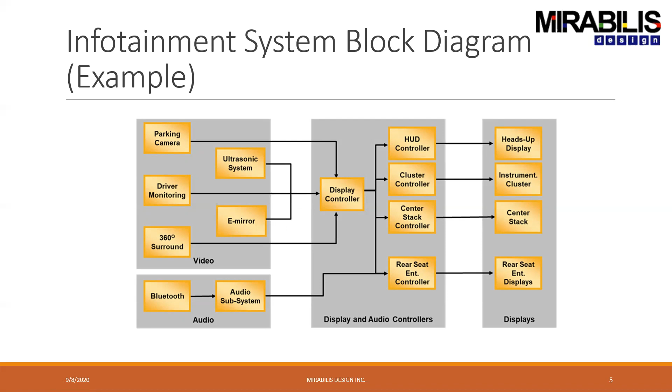Even the rear view adjustments can be done now with the infotainment. So almost everything gets connected. It's pretty big; matter of fact, I was reading somewhere that the infotainment system market is about $30 billion. So everything can be connected. It can either be a control or it can be a diagnostic with feedback. So both of those are happening.

Okay. So now, if you take the full infotainment hardware, this is the slide I took from Synopsys. There's a lot of interfaces going around, a lot of processing like CPUs, there's sensor control, there is graphics, there's even DSPs, there are security devices, there's all the network interfaces. So there's a lot of interfaces, a lot of memories, processors, even on-chip memory, things like that that are part of the whole system for infotainment.

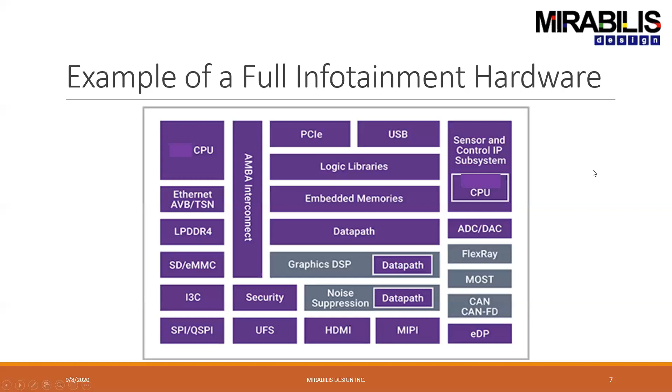Yeah. Okay. Now, the main problem that I see is infotainment systems have to be really cheap. You cannot oversize the system. So low costs, low energy consumption, and maximum number of sensor integration. Because the more sensors you integrate, there are more safety features, there is more driver experience. So it's low cost, low energy, maximum sensor integration.

So to really be able to test something, you have to run a large number of use cases with minimum amount of hardware integration. Because the space is very small, they want to use the most highly integrated chips. That's why the Drive PX is very popular, because it has the GPU, has the processor, has the CAN and Ethernet, has a lot of those integrations already done. So a single chip can replace about 5 or 6 chips in the board behind the head-end systems.

The other one that I was reading about was they don't want to build their own ASICs. Most times they just want to use or reuse off-the-shelf components and build up the system, because apparently infotainment life is very small. Within 6 months or 9 months, they have to put a new version out. So there's a constant change in the architecture or in the design of these systems.

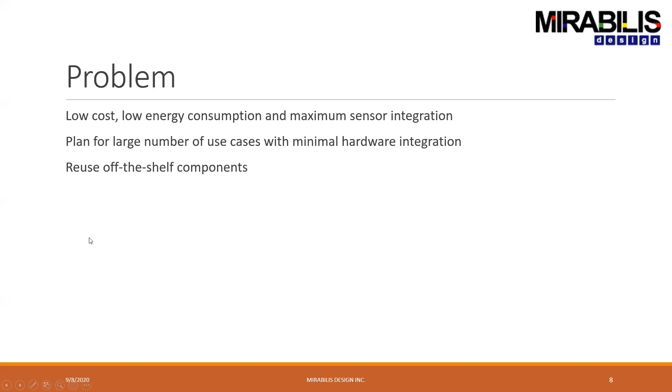So from a hardware design challenge, the biggest thing is bandwidth versus latency. As I keep increasing the latency, how much does my bandwidth fall off? So I need to keep getting the memory access for the bandwidth. So that's the most important thing. The other one is looking at how much processing time it takes on the ARM. Typically, all of these are ARM or Tensilica or ARC. These are 3 embedded processors they're using.

And so they're looking at delay for CPU or DMA, because DMA is where I have all these interfaces and I'm transferring data over to the external DRAM. So they all use DMAs. So what is the processing time associated with that?

The other big thing is that, for the display controller, say the display controller updates every 33 milliseconds, all the other processing for the data must be done before that 33 millisecond slot. So we have to look at the timing deadline for all that processing. This is the most important consideration. All of these are enabling this one, to make sure that all of them complete within the timing deadline.

Okay. Yeah. Now, the peak power, this was another thing, because these infotainment systems should be able to tolerate any temperature, be it in Saudi Arabia or be it in Finland. It should handle any temperature range. So the peak power starts increasing the cost of the system, because the higher the peak power, the higher the cooling costs and things like that. So it's very important to make sure the peak power is kept low. It's a very important consideration.

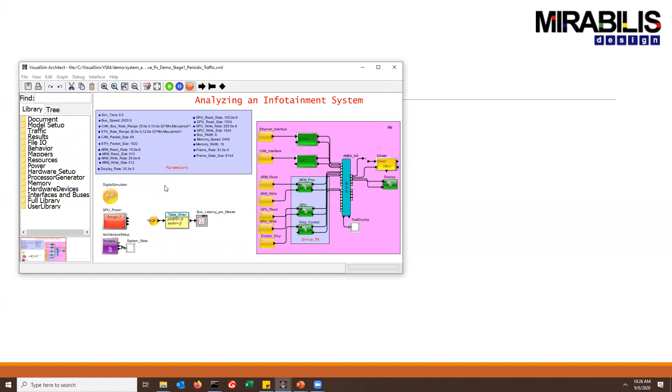Yeah, this is the one I put together. So what I did was, I kept the hardware platform like this. So I have the Ethernet, the CAN interface, multi-core ARM, the GPU, and the display controller. And then I have the AXI bus, the DRAM, display, no change.

But now I created the behavior flow here separately, meaning that I've got two different applications. Each one does a sequence of things. This part is all done on the multi-core ARM, while these here are to the GPU, and this is to the display controller. So I can kind of describe different applications. In this case, I've connected them up as two independent.

For example, here I have an enable for the display and GPU, but what I can do over here is connect them to a single flow and send them through. So rather than them having two independent flows, both of these are required, or I can feed them into a single flow and continue down. So I can have different combinations of these applications built up here.

This, I think, is a very important thing when you start getting into more details of the sequence of things my software is doing, okay? But we're not going to talk too much about that right now. Today, the focus is more on the simple traffic model type analysis.

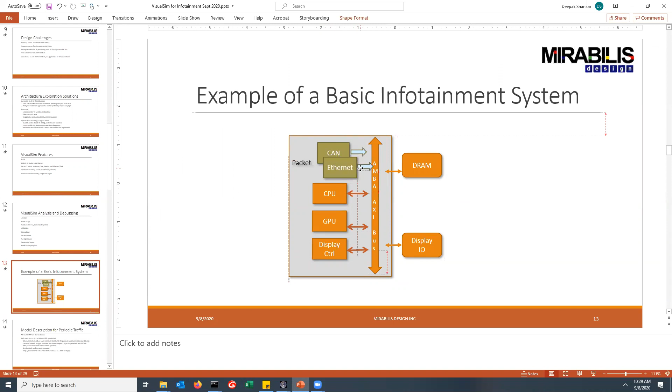Okay. So the model I constructed was this. I have two packet generators, one's a CAN and one's an Ethernet interface. Both come through the AXI bus and they go to the DRAM. The CPU and GPU read and write to the DRAM, but these are only writes. The interfaces are only doing a write to DRAM. The GPU and CPU are doing reads and writes to DRAM.

And the display controller was unique. It first does a read from the DRAM and then writes out to the display IO. So that's the sequence of operations. This one does reads and writes, while this one first does a read from the DRAM, gets the data, and then writes out to the display IO. So that's the basic system I've constructed. Any questions? No.

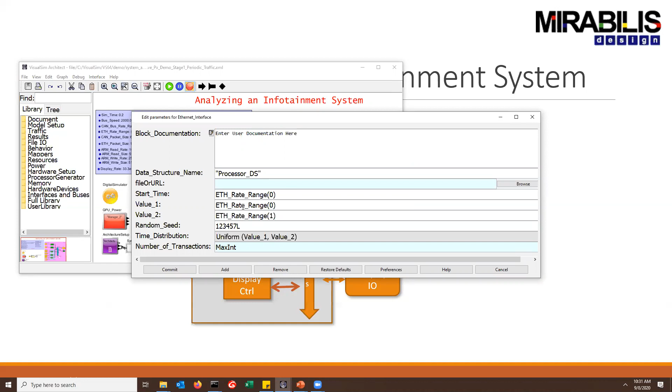So this is the system model. There's a lot of parameters, but the important ones are the CAN bus rates. This is the Ethernet. I have a start time, and then a minimum and maximum range. In this case, for the Ethernet I generate a random number between 8 and 12 milliseconds. So packets are not periodic, but come in a range, between 8 and 12 milliseconds between different packets.

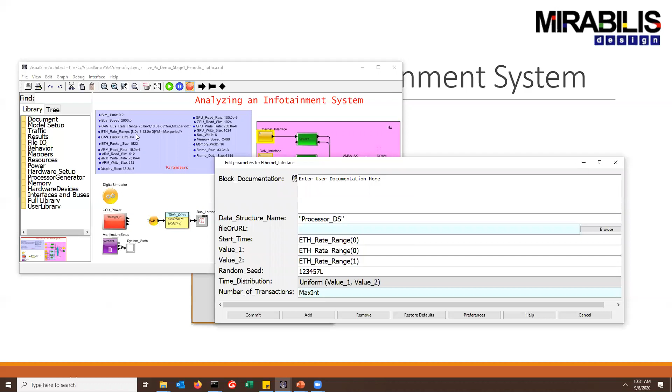Yeah, go ahead, Jimmy. Can you make the graph larger so we can read the parameters? Sure. Let me make it full screen. Can you see it now? Is it clear?

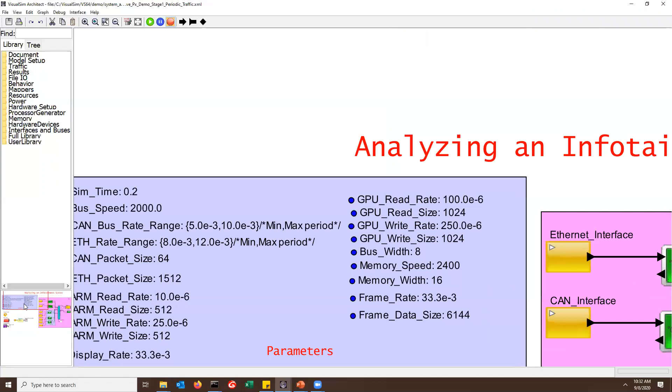Okay, so if you look at the range of parameters, for the CAN I have a min and max range. Similarly for Ethernet, I've got a fixed size for packet size.

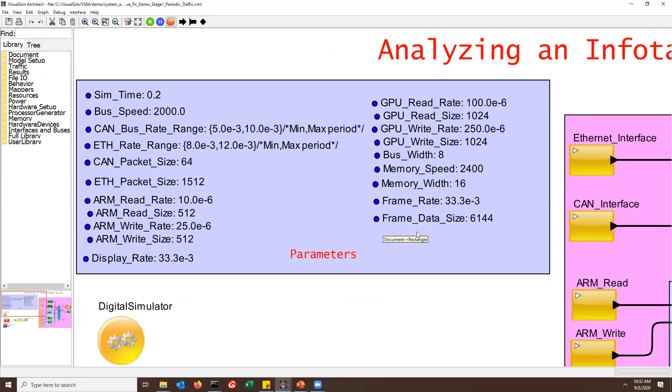These are my read rate, read size, write rate, write size. Then that's the display rate for the display controller. Same thing for GPU, and then I've got bus width, memory width, frame rate, things like that. So how is this utilized in the system?

Deepak, what is ARM read rate? I'll come to that, I'll explain what each one is. Okay, so that I just wanted to show you what the parameters were.

Now, the reason we have given lots of parameters is because we believe the user will be doing a lot of experiments. That is why we have a lot of parameters. We can discuss it and reduce the number of parameters if you want, and we can do that too. So what we have done here is we are using a traffic generator for the reads.

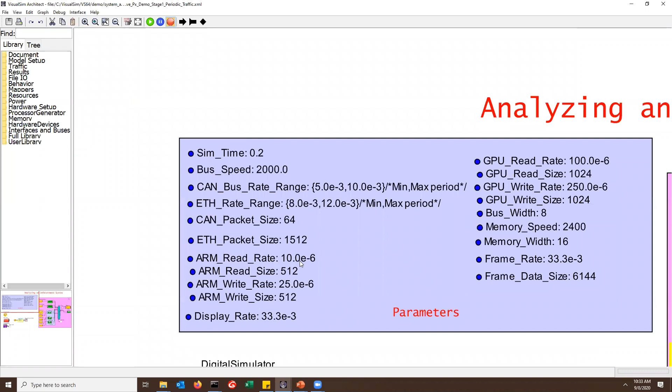So we're saying that the read rate in this particular case is a read rate of 10 microseconds. So what that means is every 10 microseconds, a request is going out—a read request from the ARM to the memory.

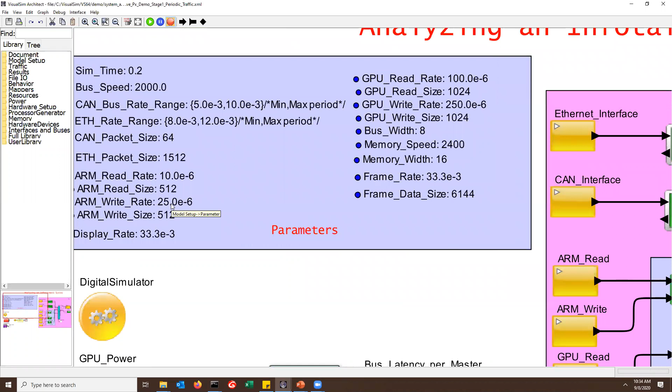Similarly, for the write, I have a write rate. So what is the write rate here? Every 25 microseconds, I'm sending a write request to memory. So read is every 10 and write is every 25 microseconds.

The value is the cycle—10 microseconds. Each 10 microseconds, to read from the memory is 512 bytes. So every 10 microseconds, I'm reading out 512 bytes. Every 25 microseconds, I'm writing 512 bytes.

Similarly here, every 100 microseconds, I'm reading 1024. Every 250 microseconds, I'm writing 1024.

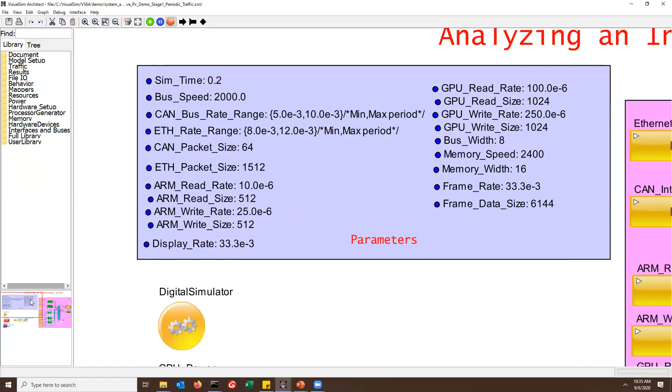So this model is very simple. Here I have my minimum and maximum range. In my device interface, all I have is a write and my Ethernet packet size—that's all, and it's going to a DRAM, nothing else is being used. Similarly for CAN, writing to DRAM and a CAN packet size, that's it. So traffic is being generated at a certain rate for the Ethernet and CAN, with the size and destination specified.

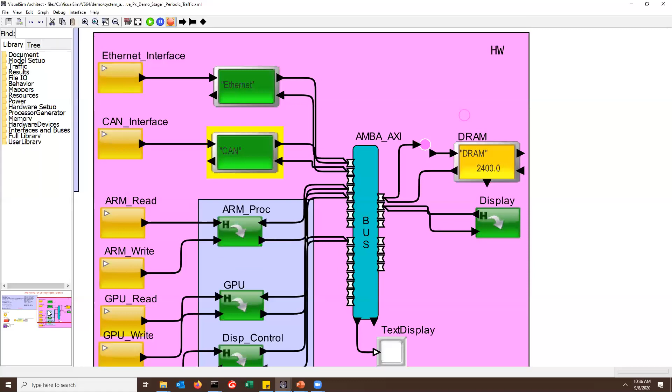Now, for the ARM, this is a little different in the sense that I have a read rate and a write rate here. Now this one here is a hierarchical block, because I have the read and write that I have to combine into a single flow.

So here I'm setting that this is a read, this is the size, and that's it. Similarly over here, I'm setting the read.

Yep, I was making changes today. Sorry about that, good catch—extra chocolates for Tanaka-san.

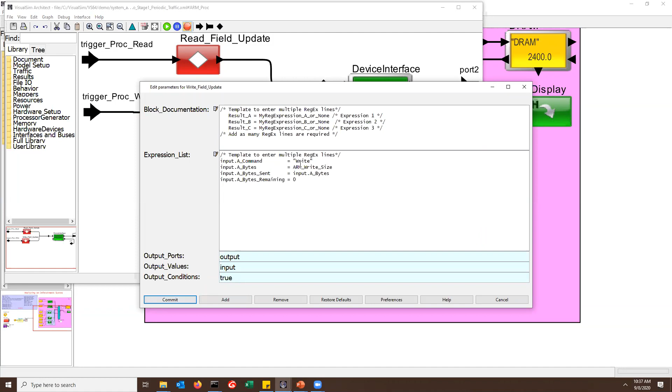So here I put a write, and then I have a write size. This one here again just has a DRAM. So depending on which flow it comes from, it reads in and goes through that—that's all it does.

Similarly for the GPU, it looks identical, no difference. So I have a read with the GPU read size—let me see if I made the same mistake here—write, with the GPU write size. Sorry, I made the same mistake in both cases. Here also no change, just saying it's going to the DRAM, nothing else.

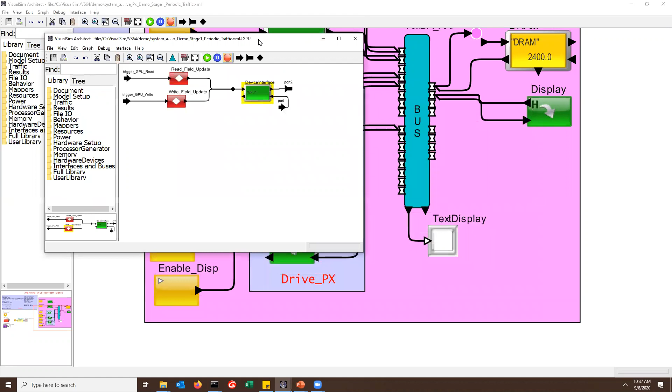And now the enable display has the frame rate, which is 33 milliseconds, very common. There's one difference inside of this: here I have the display controller going to the DRAM, and there's a read of the frame data size, which is a parameter at the top level. It goes through the flow here, out, through the flow again, to the DRAM, and when it comes back on this flow here.

What I'm doing is I'm sending it out again to say I want to go to the display. So it goes out and then it returns again, saying I'm coming, like I'm going out again. First step is I'm going and reading, which is right here. I do a read of a data size, and then when I get it back, I'm doing a write. I'm converting that into a write, and then I'm doing a write over here, writing it out to the display. The destination is a display.

In fact, I think I missed one more point over here. So I'll do an A command. I should do this as a write. Again, I missed it out, sorry. So first one is a flow, does the read, comes back, does a write, and when it's done, it comes here and says, okay, I'm done. Does that make sense?

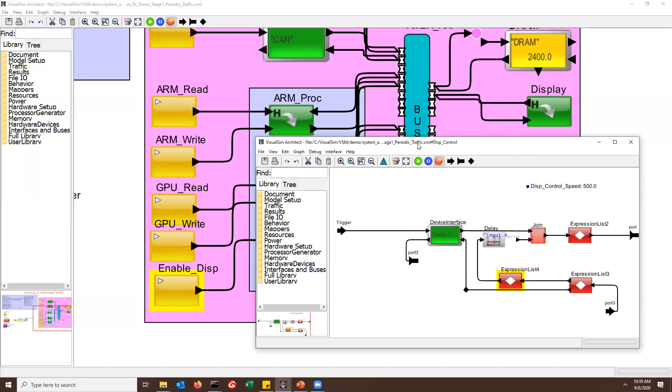Yeah, so hopefully this is a simple model. So now when I go ahead and run the simulation, I'm just going to run it first and see if there are any errors because I created all of these things.

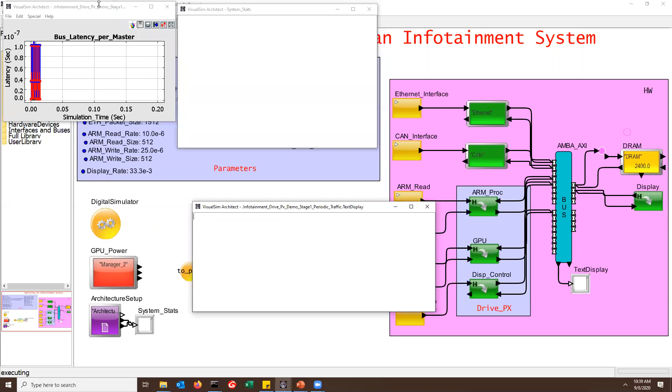So one of the first things you're going to notice, and I'm going to make this nice and big so you can see it well, is that you will see I've got the ARM, GPU, CAN, Ethernet controller, and display controller all listed over here. And you can see the range is quite high.

So if I take, like say, the ARM processor, you can see it's all the way from like 100 nanoseconds down to maybe about 1.5 nanoseconds. All the way from 1.5 nanoseconds goes up, and even there's some here that are at 200 nanoseconds. So for example, in this particular case...

See at this point, at like, what is it, at 8 milliseconds, I'm getting multiple tasks hitting at the same time. So my GPU and the ARM are coming in at the same time. Plus, I also have the Ethernet interface coming in at the same time.

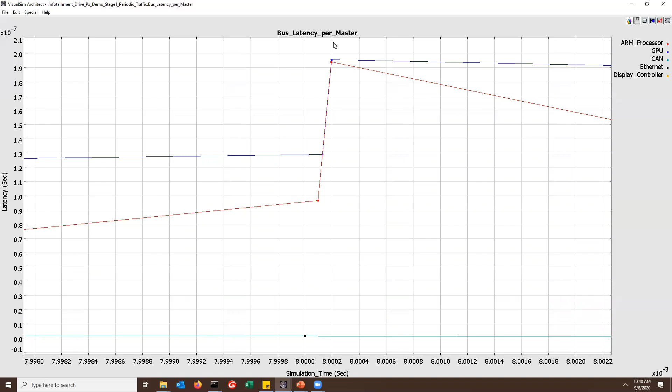So if I zoom into this region over here, you'll see I have the Ethernet, I have 2 ARMs, and I have 2 GPUs coming in exactly at the same time. Okay? So I get these huge spikes.

But also there's also some mini spikes over here. I see this, then you'll see also there's some spikes over here, see like this one over here. So there are some differences as well that show up.

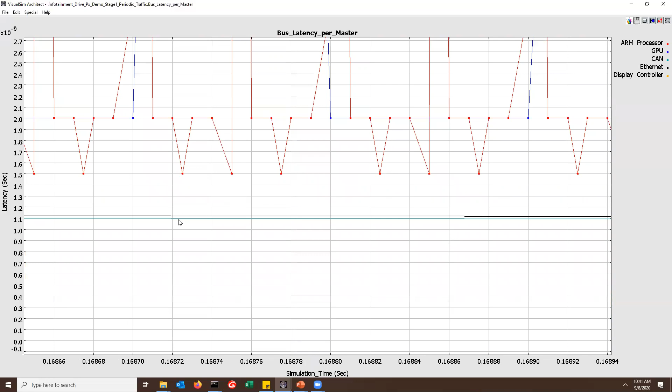Also, if I zoom into this region over here, you can also see that there is some slight changes even with the Ethernet and with the CAN bus. They're not fixed.

Okay, now, to understand what's happening, this is the parameter that's kind of important. This is the bus traffic, showing what's happening on the bus.

I'm going to go up and you can see, so master one, hang on. I'm going to move this to the side over here so we can see which one's master. So master one is Ethernet.

You can see it's writing out at this rate. Master two is CAN, it's writing out at this rate. Then you can see master four, which is this block over here. You can see the read is 51 megabytes per second, write is 20.

For the GPU, which is this one over here, going to this interface over here, the GPU's got a read of 10 reads and 4 megabytes of writes. And of course, this is the read and write on the master, and you can see the slave gets 61 megabytes of read and 24 megabytes of write.

Now, here's the thing that is key: the read and write has buffering on the slave side. So on this side, there's a buffer of 3 on both of them. Okay? So that's one of the reasons why you see these peaks here. The peaks are related to this threshold right over here, these two.

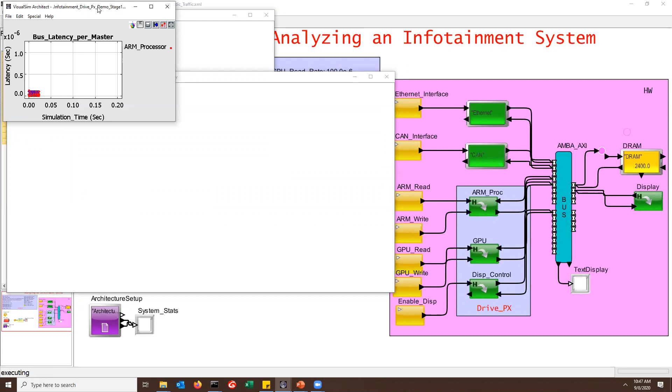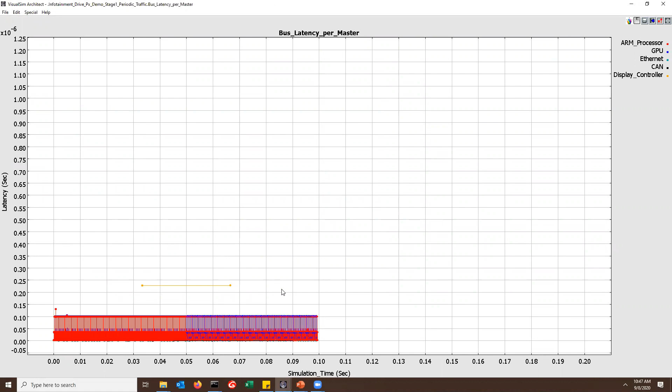So even though I increased it, the latency has not increased significantly. So what this tells me, this is an important thing here. Even though I made it 10x larger, I would expect that my latency would be much higher. But notice the spike over here, right? Even though I increase the size of the data by 10x, my latency has not increased at all. Any idea why?

Deepak, does that mean the AXI bus is never congested? This is the reason. The reason that you're not seeing it, initially the value was very low for the display controller. Then it came up to this level, but now it has not increased, right?

Even though we increased the data size, the reason is most of the latency is on the buffering. The latency is not for the transfer time, the latency is on the buffer. That is the reason you're seeing that even though I multiplied it by 10, I don't see an increase, because it didn't matter. The transfer time is so small. Most of the time is related to the buffering.

Okay, so you'll actually see here, notice the data. Yeah, go ahead. Where physically is the buffer? The buffer is on the interface, on the port here. So everyone has a different buffer, or do they all share?

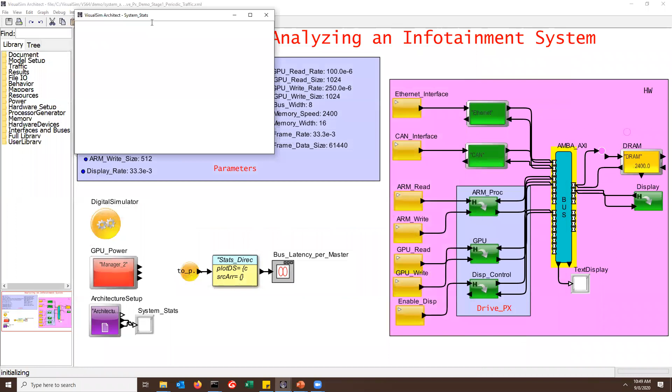Notice here it's dropped. Remember we were at like somewhere over here. Notice this is dropped.

So what is happening now is, oh, I still managed to send it through, so I don't have too much of an overhead. But let's see. Yeah, it's not much of an overhead. But let me do this.

Let me increase this to say 3, read and write to 3, and I'll keep this at 20. I'll go back to that. Now let me rerun this whole thing again.

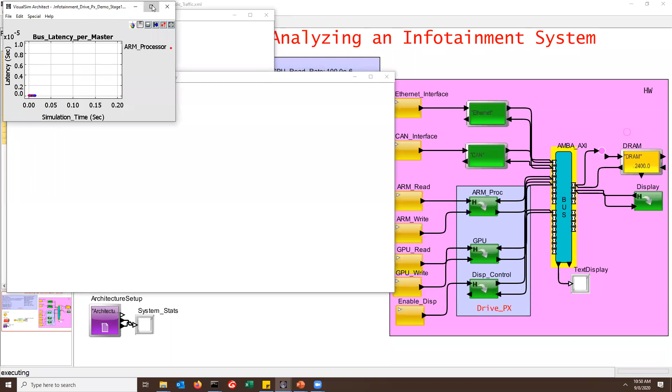Notice you don't see the GPU here anymore, you see it? So the master buffer is not so much an overhead. The slave buffer is where the overhead is, accessing the memory, that's where the overhead is.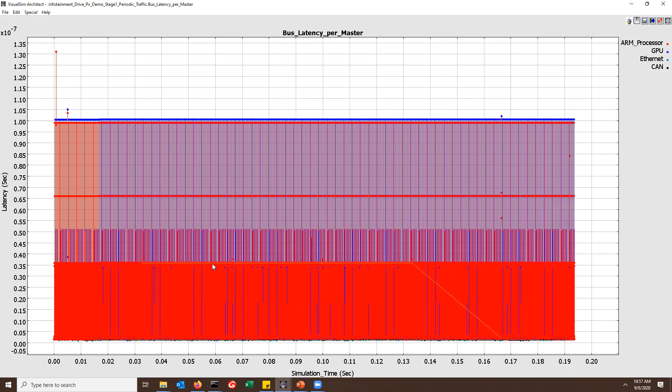This would be more if you're doing SoC with Socionext or Fujitsu, then maybe they might look at this. But with round robin, in this case you won't notice much difference. If there's a lot of overlap, you will notice some difference, but very minimal. There's a little bit of difference, not 100% the same, because you're using a different arbitration scheme. So notice here, these are the orange ones over here.

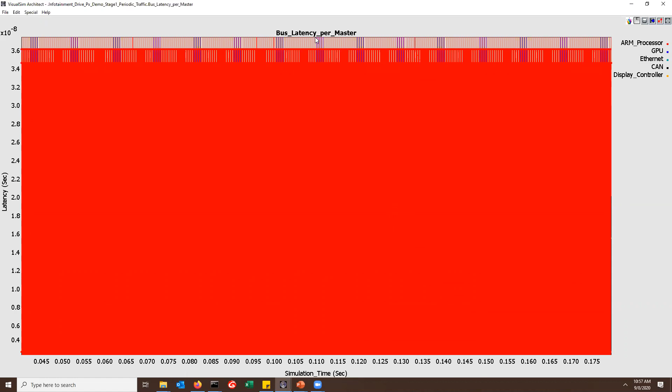Somewhere over here is the orange one, which I can't see now. 33, let's look around here. Oh, here we go. You can see this. So it's only 350. This is the display controller. That's the threshold for that one.

So you can see that earlier on it was much higher, but now all of them get equal priority. So you can see that they're going in a round robin loop. So that's the thing. Again, it doesn't change the DRAM throughput.

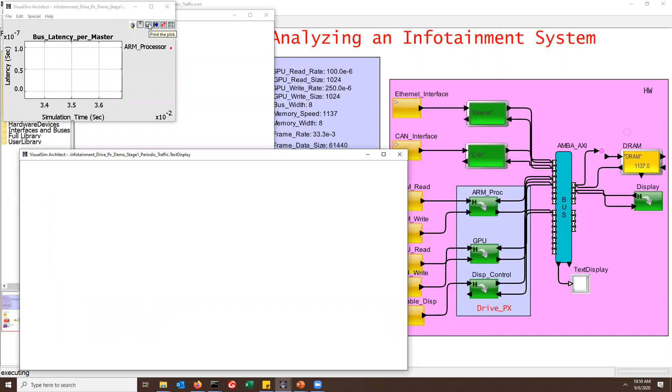Now, one thing that does have a big impact, I can do 1136 or 1137, which is the DDR3, and make this 8 bytes. So this is changing the memory. I put a cheaper memory. You can see that not a whole lot of difference because the memory is not utilized that much.

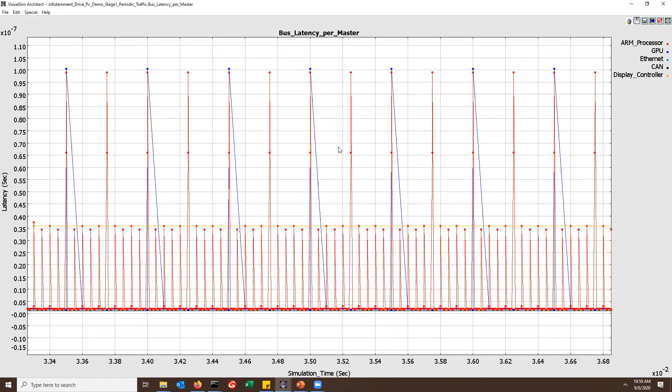It's still at that 0.35, but there's a little bit of difference here. See, there's only that point. At that point, there's a lot of things acting at the same point. Multiple requests are coming in at the same time. So that's the reason. You can see the CAN bus, the ARM, then there's the GPU, they're all coming.

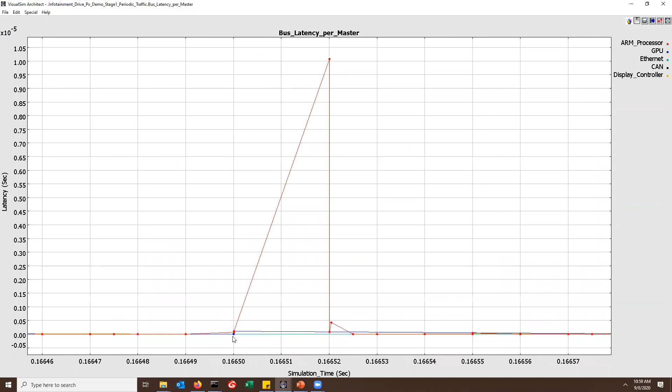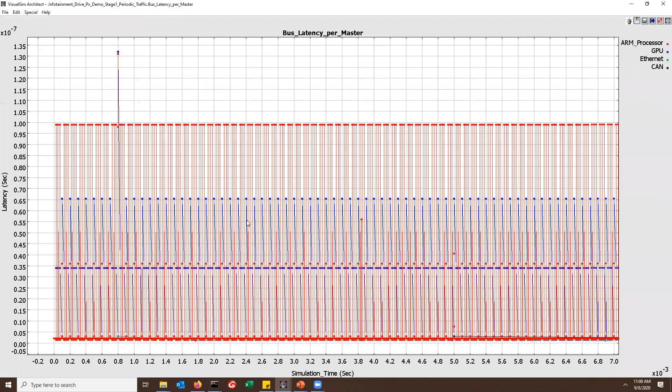So what I can do to make it really, really look bad, I can change this. I can change the ARM read to -7. And then I can change the, yeah, I can do that. And I can change the GPU read to also -7. So you can see how the whole thing has changed now. See, the range of this is much higher.

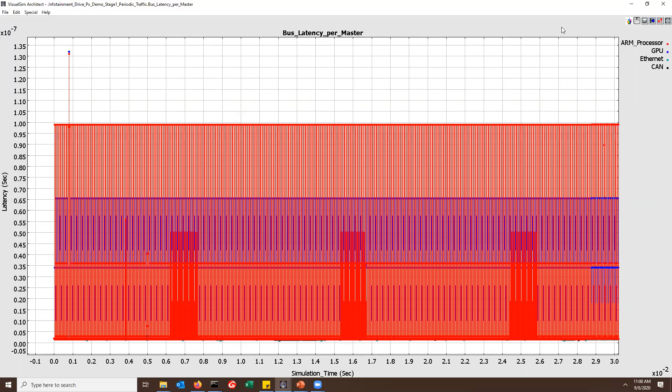Actually, if you look at these, look at this, it's not flat. You can see where the Ethernet is also changed. I'm sorry, the CAN bus has also changed. Okay. And notice also it's taking a lot longer to run. Oh, here we go. You can see this, lot of activity right at that one point.

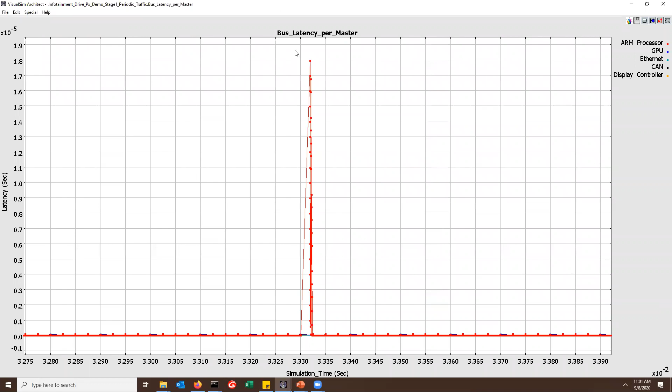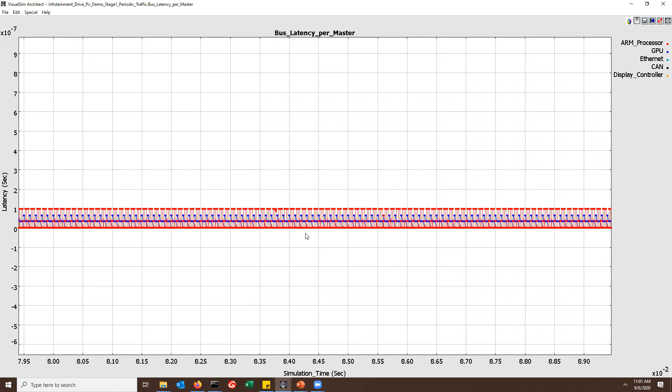So at this point, there's significant buffering. So a lot of the ARM data is being packetized right over here. So a lot of activity right there, even at this point. So you notice this one also, there's a spike up over here for the GPU. And it happens at these regular intervals.

So this is when the display controller is acting. So 33, 66, 99. So that's when the display controller comes on. And that's when you see these spikes. So display controller is essentially blocking off everything else, because of the amount of data it has to transfer. Okay.

Deepak, is there a way to resolve the problem when display controller is active? It looks like the problem is quite serious. Yes, it is. So the display controller gets the highest priority because, the thing is, the driver experience is what time the screen gets updated, right?

So if it does not get updated at 33 milliseconds, like my daughter, if she turns on Netflix and it doesn't come on immediately, she turns it off and goes to Amazon Prime. No patience. Same thing. If Spotify does not come up on the display screen in our car immediately, she gets upset and goes to some other channel. So the display controller part is the most important thing. It has to show up.

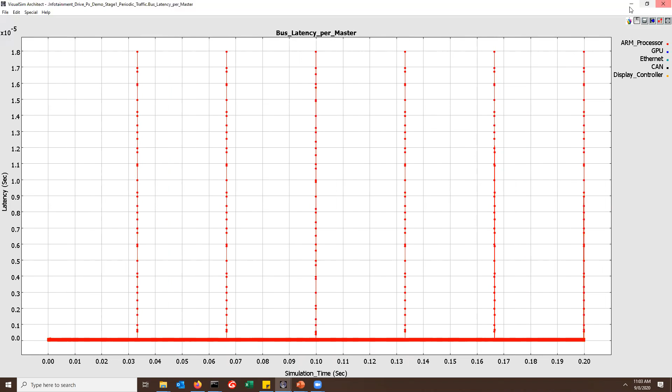Okay. So everything else you can delay except the display controller. Also notice now we went from about 86 to we're now at 587 megabytes. Now what I'm going to do is I'm going to increase the data size over here even more to try to cause a problem on the DRAM side as well.

See, the main idea here is, the ARM and GPU rates changing is really all about how much more processing can I do? How many more things I can do? Like going from a 1080i versus a 4K display, right? The processing is significantly changed. So it allows me to look at what happens in those different scenarios when I change some of that processing. How does it impact my system?

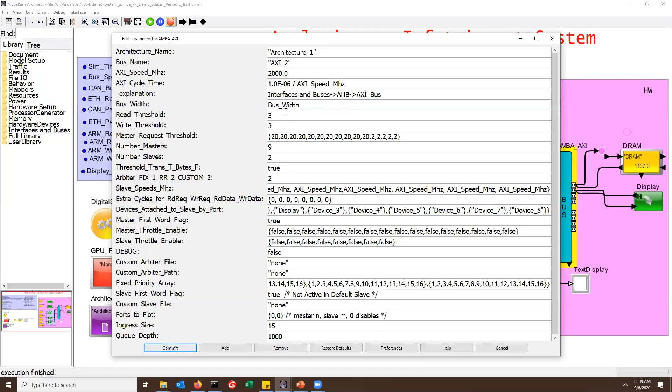But the user can modify the memory because that's an external device. Because I can buy a DDR3 at 1137, or I can buy a DDR4 at 2400. I can buy different DDR chips. Okay. That is decided by the systems engineer. Yes. And these, again, Ethernet interface, CAN interface, that depends on your design. So these four are important from a design standpoint.

These here are just providing information to say that I'm going to be processing so much data. Again, software engineers will have this information, GPU and the ARM rates. Yeah, maybe the customer can, it depends on the application. Yes. Software. Exactly. That's correct. Software engineer can set the read cycle and write cycle. Yes, okay. So this is one version of the model.

Okay. Deepak, go ahead. Can we try out something on the memory side, say the access time? I just did. Sorry, wrong model. Oh, there we go. I changed this from 2400 to 1137. Not a whole lot of changes because when I look at the stats here, wrong stats. See, I'm only consuming about 602 megabytes. At 1137 times 8, I've got almost 8 gigabytes of memory capacity.

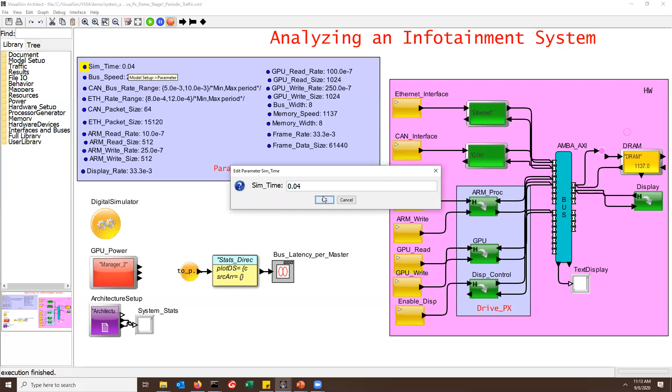Then I'm going to reduce this even more. I'll make it 865. Okay. We're going to rerun it. I'm not running for 200 milliseconds, I'm only running it for like 40 milliseconds, so it finishes faster.

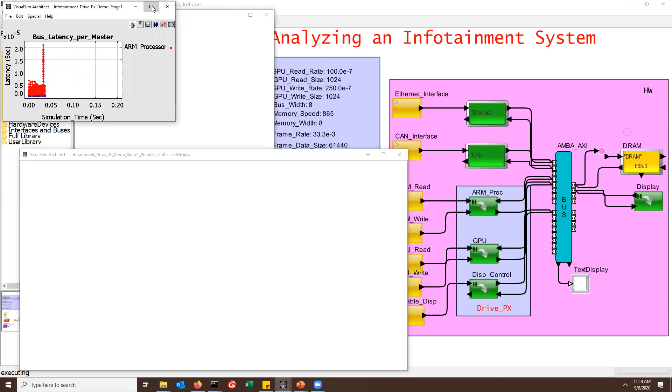You can see the spike right over here. There's some smaller spikes also now, so you see a lot of smaller spikes as well. Let's see. This is at 878, so it's about 31% utilized. Let's see what's happening here.

Okay, here we go. So what has happened now is the ARM, there's an overflow. Because here I'm sending this data in, but now because the DRAM is not able to handle the workload, I've got packet overflow right over here. So I've slowed down my DRAM. DRAM capacity is still high, but because the DRAM is slowed down, I'm starting to get overflows right over here.

Master, let's say master overflow. Overflow means reject. It's dropping the packet. It's dropping the request. Yeah, it's rejecting, dropping the requests. That's what's happening. Does that make sense, Jimmy? Yes.

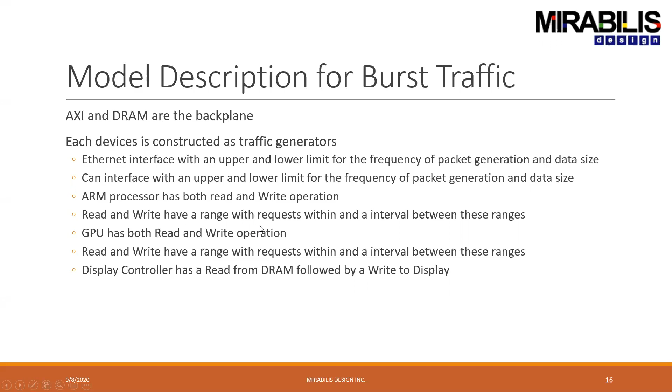Now, same design, these are just more details I've written about them, and I've suggested some changes. Now I've modified it where I'm creating these regions. For a certain amount of time, I have a certain amount of data, then there is no activity. Then again, for a certain amount of time, there is some data going. So I have this interval-based traffic. Now I'm going to move into that type of a model.

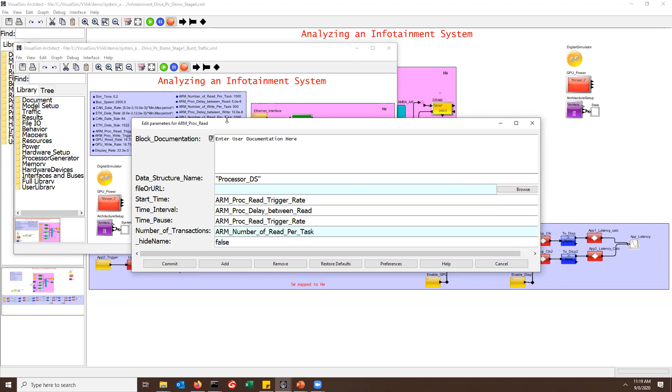What is different is, if you notice here, I have the minimum and maximum range, and I'm generating packets within that range. Same thing for CAN and Ethernet. But now for the ARM processing, I have a start time, then I say this is my interval. So in this case, my start time trigger rate starts at 1 millisecond, and then my time between the reads.

So there is a range of about 50 nanoseconds. And during that 50 nanoseconds, the number of read tasks is 1,000. So within that 50 nanoseconds, I'm generating 1,000 requests, for a certain period of time, which is the trigger rate. Where's my trigger rate? Here we go. And then for 1 millisecond, there's no activity.

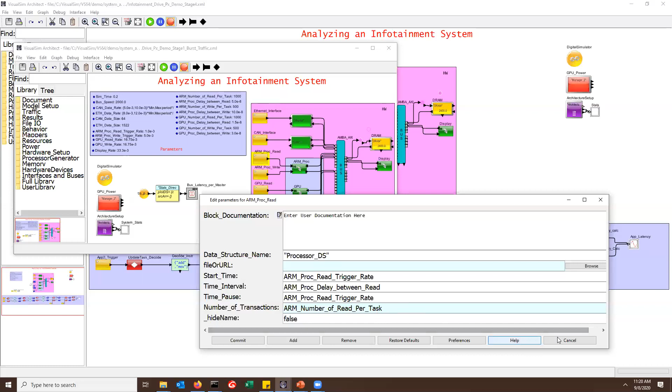So there is 1 millisecond, no activity. Then for 50 nanoseconds there is activity. Then 1 millisecond, no activity. Then 50 nanoseconds of activity, and so on. Within those activity periods there are, in this case, 1,000 requests. So same design, everything else is the same. If I go inside of this, let me check this because we made this change. Let me change these to write.

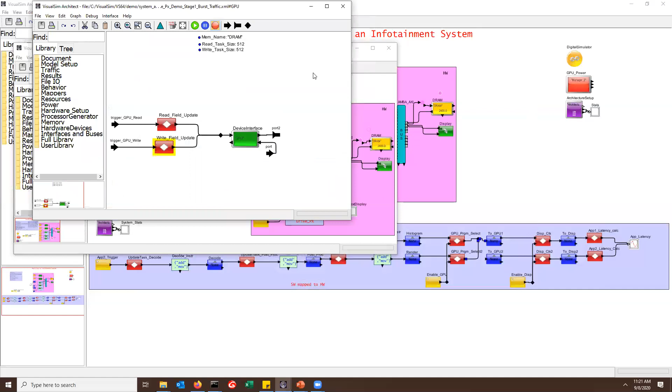And display, make any changes here. Display controller. Oh, sorry.

So what I've done now is rather than just saying data comes and immediately sends it out, I've created a DMA here. Okay. So earlier on it was just, whatever came in, it immediately sent it out. But now we're using a real system, so we're adding a DMA block to it. It'll give you an additional delay associated with the processing that is now incorporated in here.

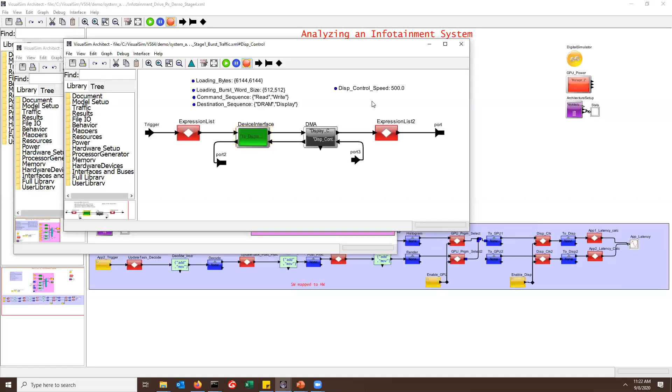Okay. So essentially what this model does is it adds more accuracy to the request timing. It makes the display thing become more of a DMA. It adds some of that functionality here. So when I go ahead and run it, now this one is obviously running a lot of data, but also the profile has changed a little bit over here.

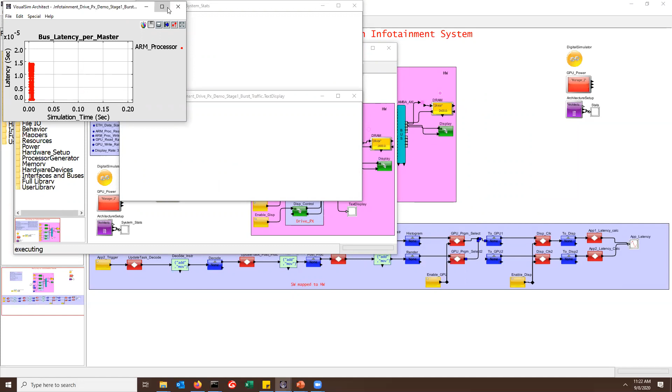Because they're coming in bursts. And notice over here, you can see a spike. So even this one over here, the GPUs, notice the spike to the GPUs as well. So now as I keep refining the model some more, the DMA, all of these different operations, I'm starting to get a more accurate picture of what's happening in my system.

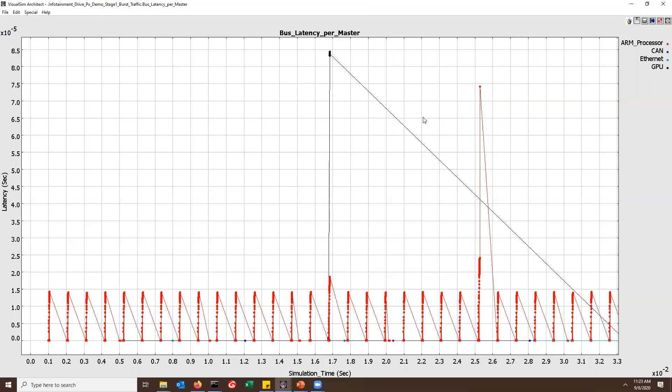Oops, that's when 33 milliseconds is showing up here. You can start seeing now it's not a fixed value. The ranges of these latencies are quite different. Most of these are fixed, but when many of them are interacting, you see the ranges are changing also.

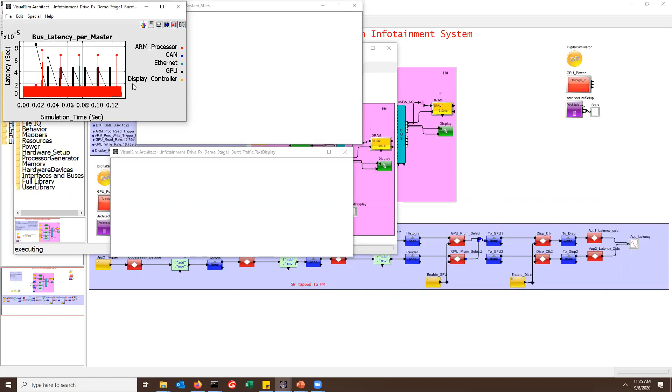It doesn't need to run for so long. We can cut it right over here. I think I was trying to run it for much longer just to see if there's something interesting, but I think it becomes very symmetrical after some time. So only here there's some activity, but right over here at like 0.04, you can stop it. But this one has a huge amount of data. The number of requests, everything is very significant in this model.

Tom actually reminded me of something. On the AXI bus, you can give higher priority to the GPU in the fixed priority array. That way the latency will be lower for the GPU. I think I forgot that one. I'll write that up also.

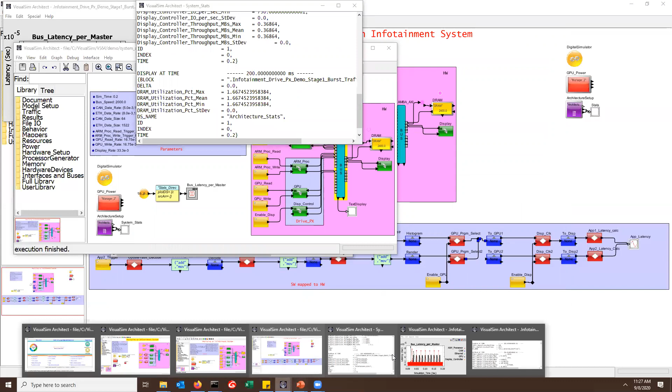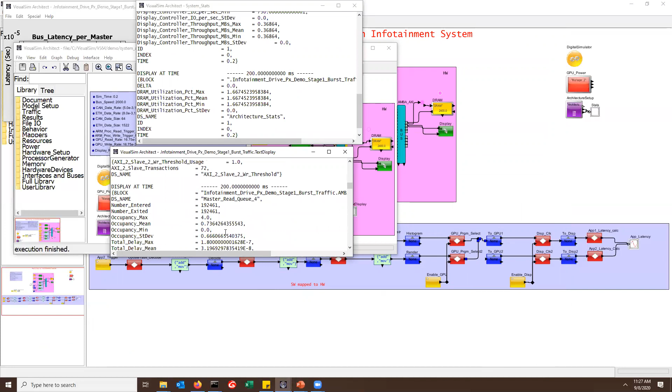So notice over here, I reached my peak threshold for the slave. And the peak read and write is over here. There's also one for slave 2, for the display, over here as well. Okay. And notice for master 4, which is the ARM, it's got a 4 for the read, 5 for the GPU.

And then for the writes, master 1, 2, okay, let's look. Master 4, that's got a 5 for the writes. GPU has a 5 for the writes. So there was actually a lot of buffering for the writes as well in this model. And then you can see the throughput, number of IOs per second on the DMA block for the display controller. So it's 750 IOs per second.

That's what's happening. This shows me what my DRAM usage is, the throughput. And this tells me for every device how much memory it is consuming. So notice the GPU, the DRAM throughput is 701 megabytes per second. But you can see how much the GPU and all these other ones are taking. You can see what the latency is across the DRAM as well. It shows you those details also.

Now in this model, you can change those windows of operation. So you can have a larger delay. For example, here, the processing delay time, I can make it -7 here for the reads. And then I can make this to be like 2500. I'm going to make this a little smaller. I'm going to make it 0.04. Go ahead and rerun it.

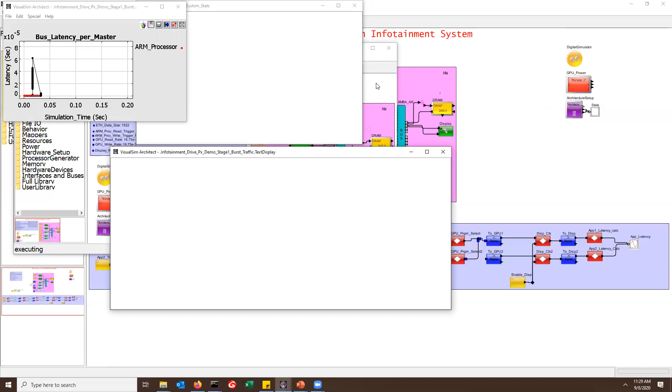Tanaka-san, hi, is everything okay? Yes, yeah, yeah, okay, okay.

I needed to understand the text, how to understand the text display, what it means. I need to understand the text display messages.

So we have two different text displays here, correct? This one is from the AXI bus, and one is from the old system statistics. The one from the AXI bus will give you information about how the traffic is going through each master and each slave, so that gives an understanding of how the internals are working. People who want to debug more can use that statistics message.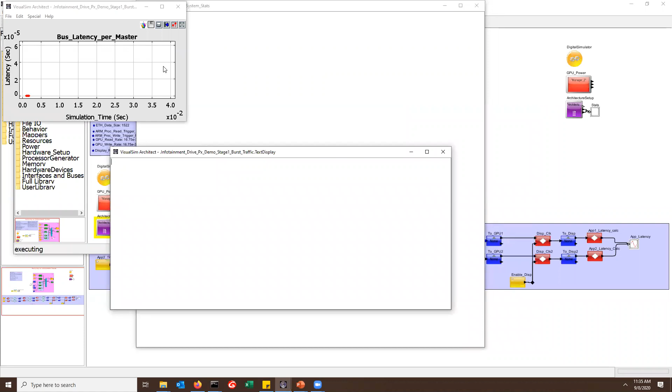So if we increase the number of samples to maybe 10 and run the simulation, we can see a lot more samples. More samples means more information at those instances of time, so we can see how the max and mean change over time according to the number of samples we are calculating.

What is the number of samples? Let's say I am running the simulation for 40 milliseconds. If the number of samples is 1, we calculate the statistics only once, at 40 milliseconds. If the number of samples is 2, we calculate the statistics 2 times, one at 20 milliseconds and one at 40 milliseconds, so now we have more data to get the statistics from.

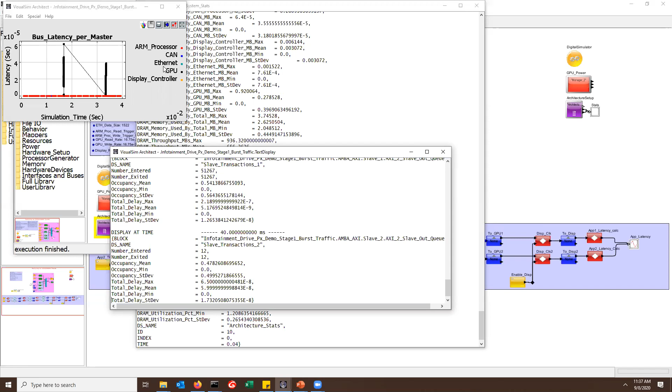So in this case, I have increased the statistics count to 10 count. So every 4 milliseconds, I am calculating the statistics. So 4 milliseconds, we are getting one, then 8 milliseconds, so we are getting more system information. This is a sampling time. Okay, I understand, thank you.

So do you understand everything on system stats? Everything okay? Yes, okay. If you have any doubts, please tell me.

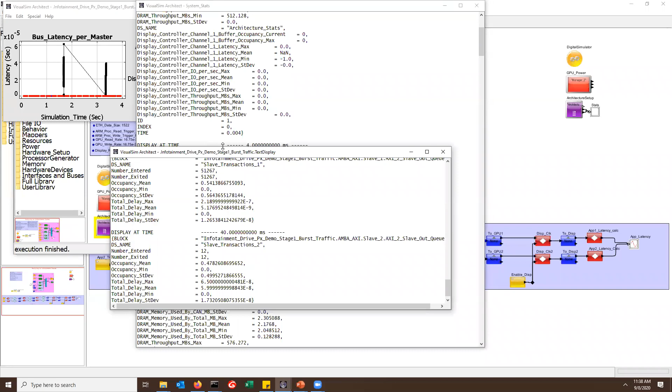Okay, good. Now there is another text display which is obtained, having information from AXI bus. This only has information from Axibus. At the end of simulation at 40 milliseconds, it will print out details on what happened internally to the Axibus. The first message will be about the overflow.

As Deepak mentioned before, each device, each master and slave has a threshold, like it can be 2, 3, 10, 15. We can modify it. So if the threshold is reached and overflown, then that will be mentioned there, and which device was overflown. We can see axi_2_master_5, that means master 5 was overflown. Master 5 in this case is GPU, and the number of overflows is 576, so about 576 packets were rejected.

So that is the first part of it. It says that from master 5 of Axibus, axi_2, about 576 packets were rejected out. Then the next statistics, axi_2_master_1. So the next part will give information about each device's read and write throughput, how many megabytes was done during the simulation.

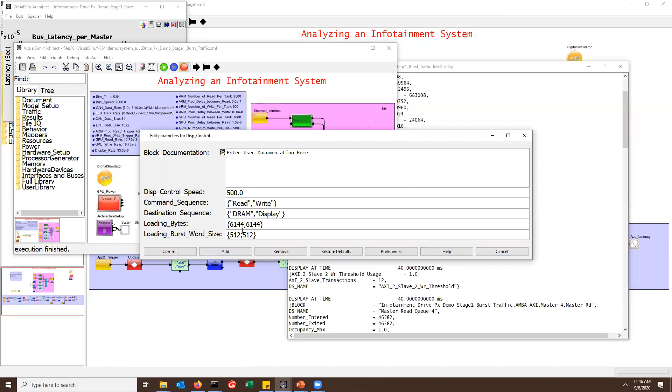Okay, 12 times is the bus cycle that occurs. Yes, exactly, bus cycle and update for the DMA. So that's how you get the 12. Okay, good, so that's how it works.

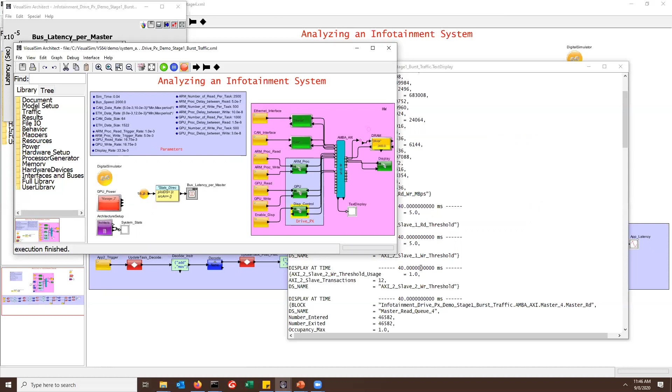Okay, so now there's another model that we have built. This is the second model. The difference is the traffic for the ARM and GPU has changed, it's a different traffic block. And then this one has a DMA. Two differences. The third model is this one over here.

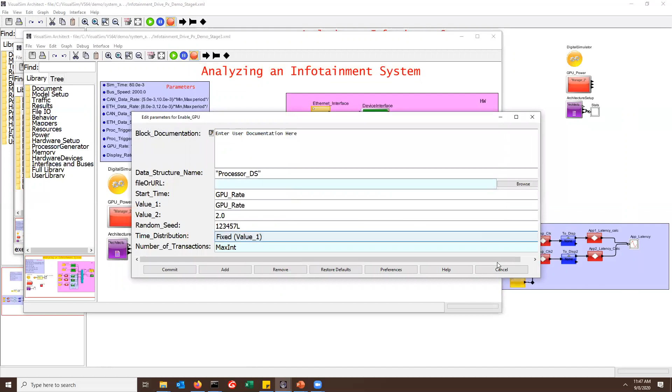This model now is going to hardware. Here what we have is, all of these are now back to using the old traffic generator, just the GPU rate, the ARM rate, things like that. But when I go inside of this, I'm implementing the Drive PX completely, the full hardware implementation of Drive PX. Now this is the hardware.

What does the user change? The user changes this information, that is the list of tasks that are going to execute on those processor models. So this is the more detailed version. I don't know if you want to do it today. Maybe let the customer try the first two models, then we can do this model for them.

Okay, so this is the flow. The ARM is getting triggered, you have the flow, and then this one here maps it to one of these processors. Okay, I'm just going to go ahead and run it so you can see the difference.

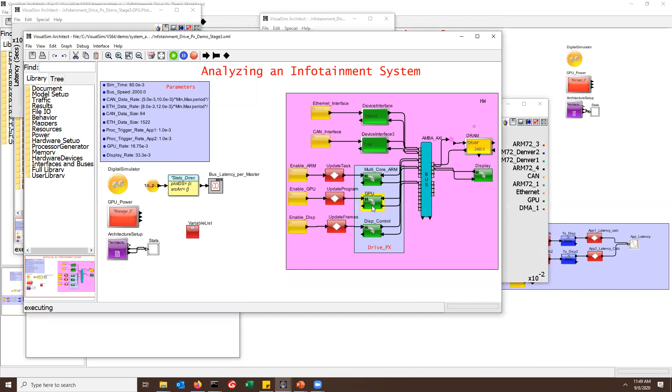This is what these two processors, the ARM and GPU, the latency is quite high now, because it's no longer just a read and write request. Now we have the detailed GPU implementation inside. So this starts becoming a very detailed model of the system.

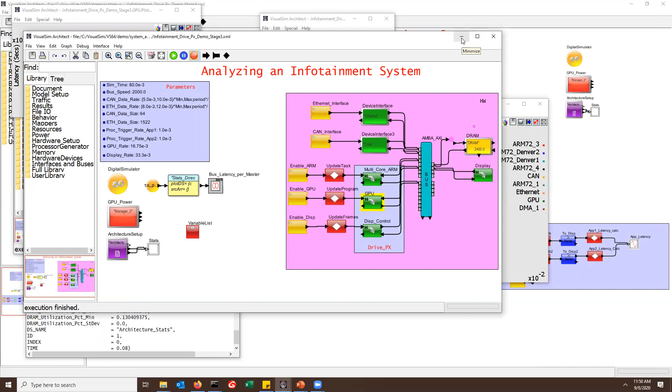So now when I look at this, you can see what my DRAM utilization is. Then I can see, for example, here, the important ones, let me go up to one over here. If you look at this one, you can see what the pipeline utilization is, the iCache and Dcache, in this case there's no Dcache activity but you can see the iCache activity. You can also see the L2 utilization, in this case there's no L2, but here we go, you can see what the DRAM usage is now. So everything changes, you start getting more detailed statistics on the model.

So compared to the previous one, this is a very different model. So this is another type of a model that we have created. Now, this one here is more hardware centric. So we've created another variation of the model. This is what I was showing you earlier. In this case, the user does not modify anything over here except maybe the DRAM speed. But here now, he focuses on only his application. So you can have any number of applications and you can specify these applications.

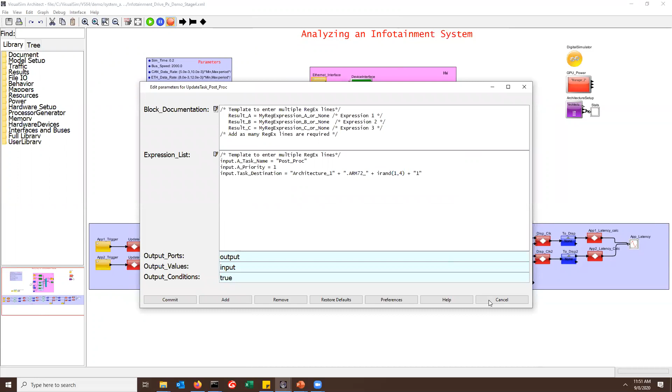Like for example, over here, I'm going to the Denver one. Here I can specify I'm going to the A72 one. Then right here, I'm saying, I don't care, I'm going to either 1 or 2. While here, I'm going to any one of these 4 cores. So there's a number here, generating random numbers. So these are all going to different processor cores. And this one here is going to the GPU. This one here is going to the display.

Okay. So now this flow here is like the traffic model, but now we have more detailed definition of what exactly is happening through the system. When it happens, what happens before, what happens after, all of those are taken into consideration. So you start with a traffic model, get burst traffic, you do a simple hardware model, and now we're doing a more detailed analysis of what your software can do. Right? So it's the next level.

Yeah. Okay. It looks good because it just started at the basic model and, yes, I hope the customer can understand from the very simple basic model to the detailed model.

Okay. Hello? Yes. Okay. So the latest install has all of these models, but if you don't have the latest install, I will email these models to you so you can try to do some experiments with it. Okay. Yeah.